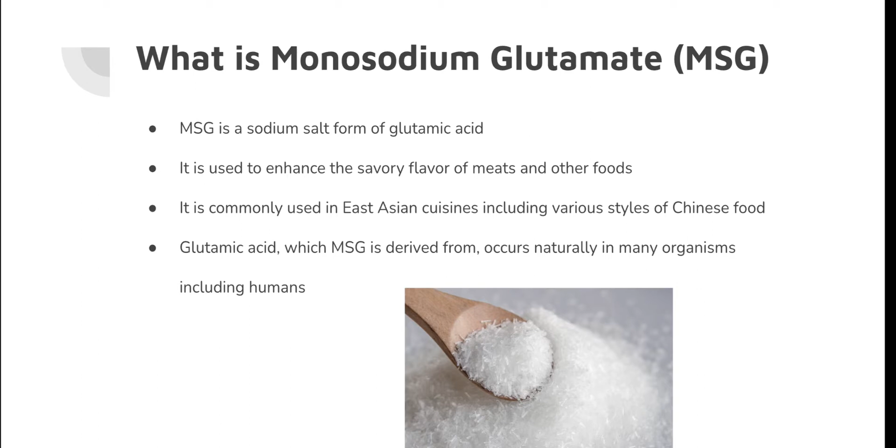What is monosodium glutamate, or MSG for short? MSG is essentially the salt form of the naturally occurring amino acid, glutamic acid, with a sodium ion substituted in place of the proton on the amino side carboxylic acid group. Its main purpose is as a food additive, mainly a seasoning used to bring out and enhance savory flavors in meats and other savory foods.

Early commercial manufacturing of monosodium glutamate saw production through the use of the bacterium E. coli. Our production method involves the use of a different species known as C. glutamicum, which is safer as it is not known to be a pathogen like E. coli, and it is more efficient in terms of production of glutamic acid as well as other amino acids.

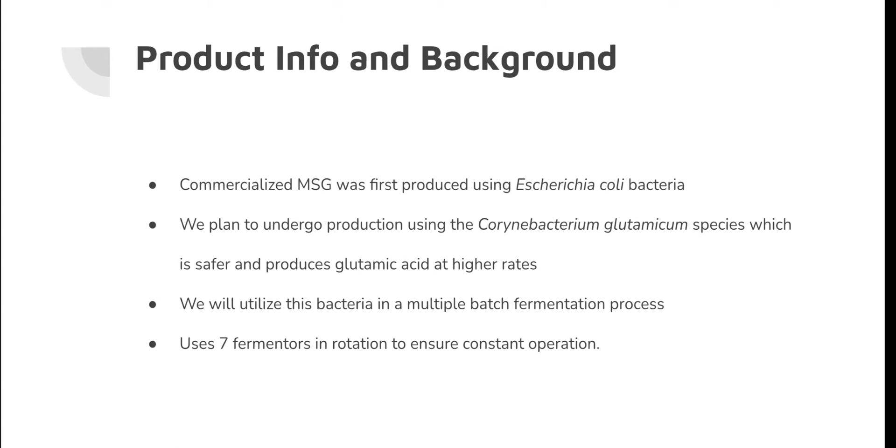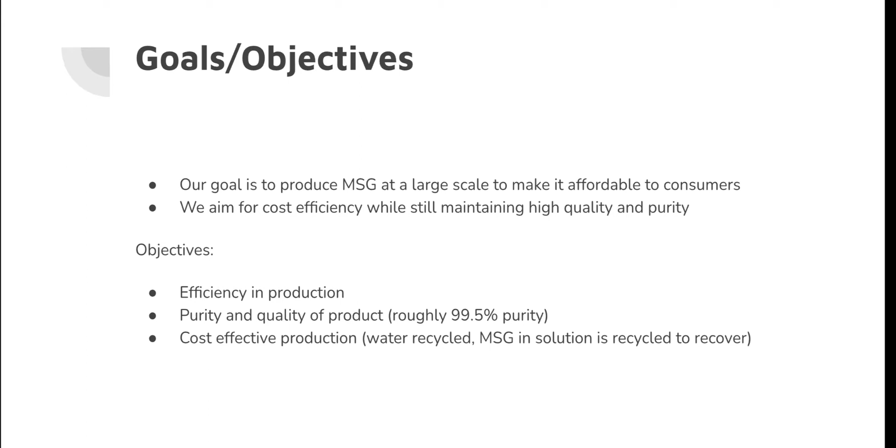Our company's goal is to produce MSG on a large scale in a manner that allows for affordable pricing and thus easy consumer access. We hope to maintain a high level of quality and purity in our product while still marketing our product at a low price. We aim to achieve this through efficiency in production, such as staggered fermentation to avoid downtime, as well as recycling our water used in various stages of production and recycling our MSG containing solution to minimize loss of product.

This is our quality function deployment, comparing customer needs to the specifications required to meet them. Here you can see that our top priorities are the quality of raw materials used in production and a thorough purification and refining process for our final product. This aims to meet our top consumer needs for a food seasoning product, which are simple: to make sure it tastes good and does not contain any abnormal flavors from impurities, and to ensure the overall purity and safety of the product.

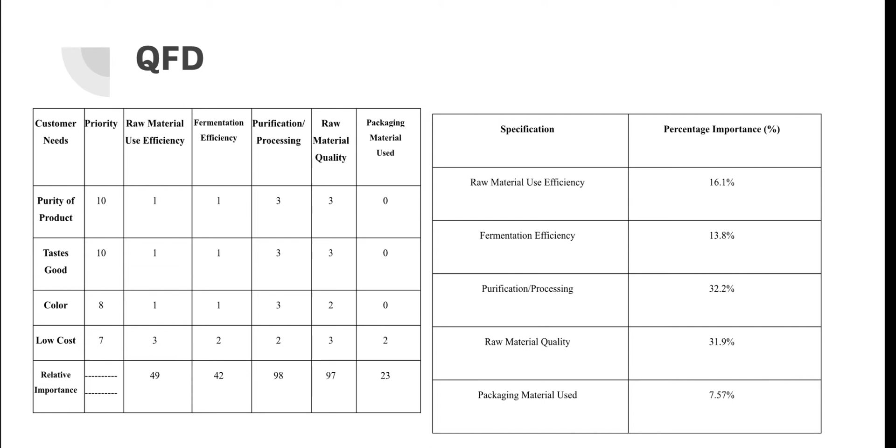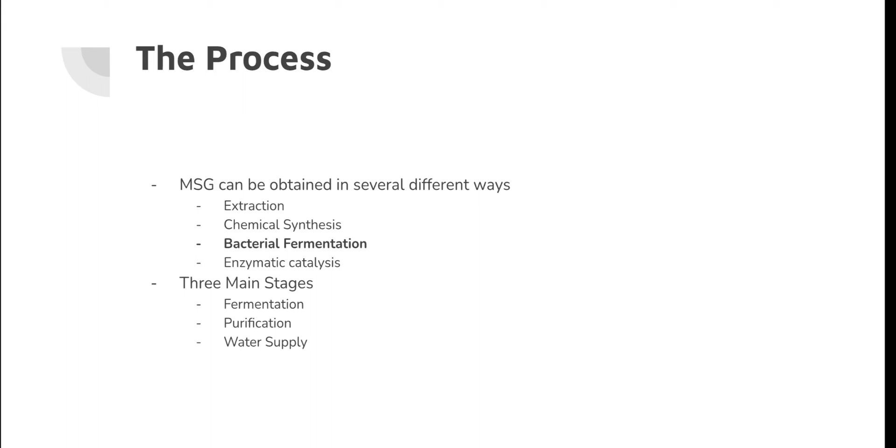Moving on to the production process of MSG, MSG can be obtained in several different ways. They can be attained through extraction, chemical synthesis, bacterial fermentation, and enzymatic catalysis. Our company will be focusing on bacterial fermentation as our method of production. It has 3 stages: the fermentation stage, the purification stage, and the water supply stage.

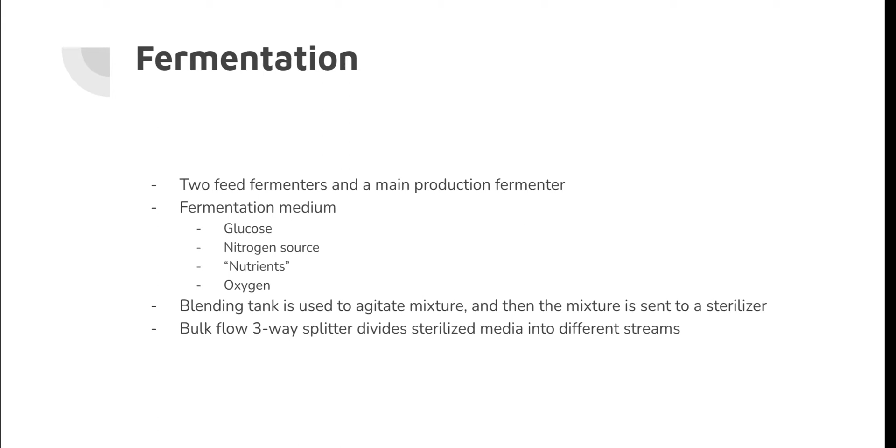The fermentation process consists of 2 feed fermenters and a main production fermenter. All 3 use the same medium. It consists of glucose, a nitrogen source, nutrients, and oxygen. A blending tank is used to agitate the mixture, and the mixture is then sent to a sterilizer. Once sterilized, a bulk flow 3-way splitter divides the media into 3 different streams.

Once the sterilized media is divided into 3 streams, the broth is then sent to the next feed fermenter. All fermentation procedures include the following operations: the steam in place, which ensures sterile conditions, the pull-in media, pull-in water,

the transfer in NH4OH, where pH is adjusted with the addition of ammonium hydroxide, which is also the main source of nitrogen, pull-in inoculum, the fermentation stage, where the microorganisms grow and convert glucose and other nutrients into glutamic acid, the transfer out stage, and the clean in place stage, which takes place at the end of each batch and includes an initial water flush, a wash with 2% NaOH, and a final water wash.

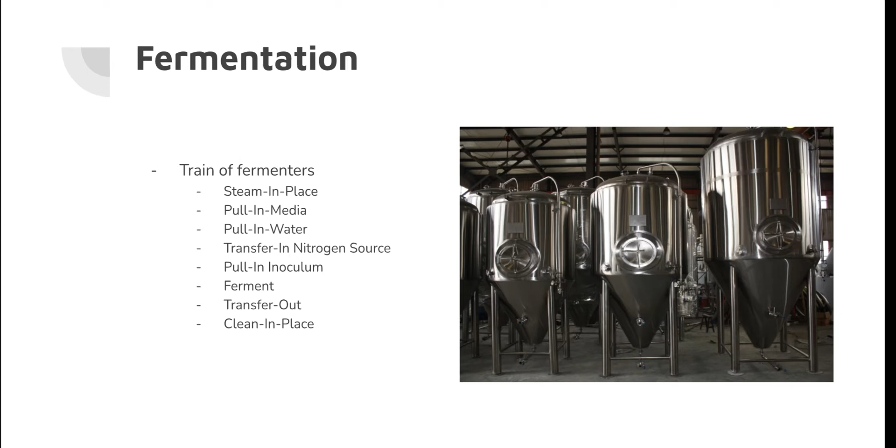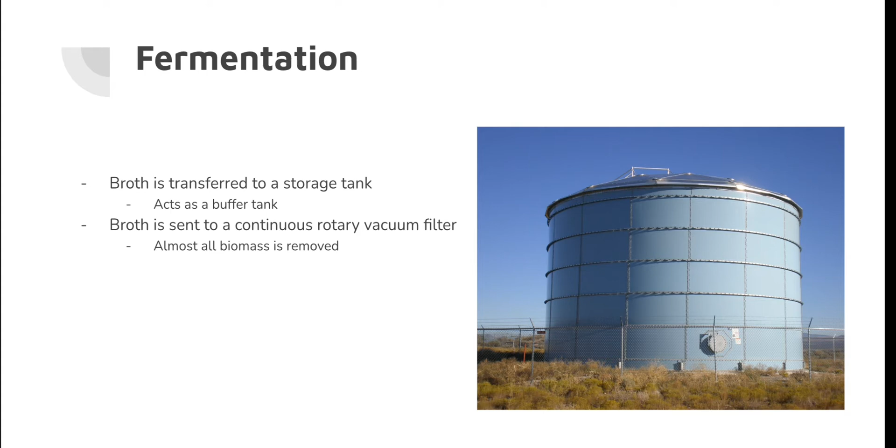Following the main fermentation, the broth is then transferred to a storage tank. This tank acts as a buffer tank that receives material from the fermenters that operate on batch mode, and also feeds continuously the downstream section, which operates in continuous mode. The broth is then sent to a continuous rotary vacuum filter where almost all the biomass is removed.

Following the fermentation stage is the purification stage, where the product is currently in solution. The cake is washed with water, and the filtrate of the rotary vacuum filter is heated and then passed through a mixed bed ion exchanger. The mixed bed ion exchanger has following operations.

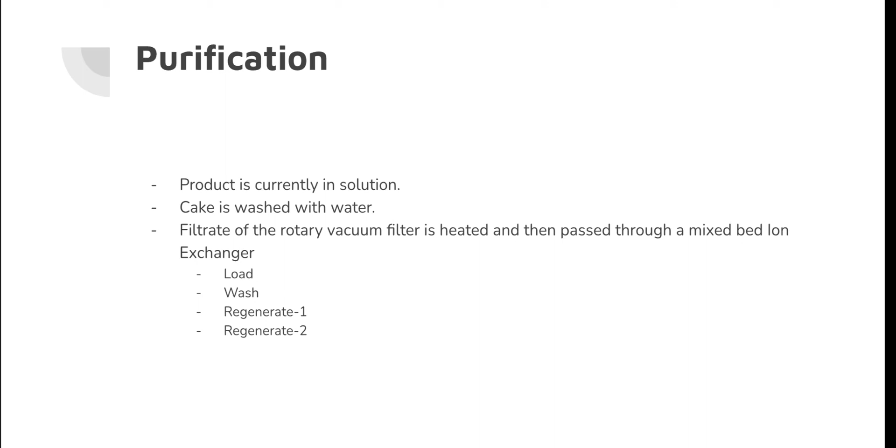It has the load, the wash, the regenerate 1, where the column is regenerated with 2 bed volumes of 1 molar HCl solution, and the regenerate 2 stage, where the column is regenerated with 2 bed volumes of 1 molar NaOH solution.

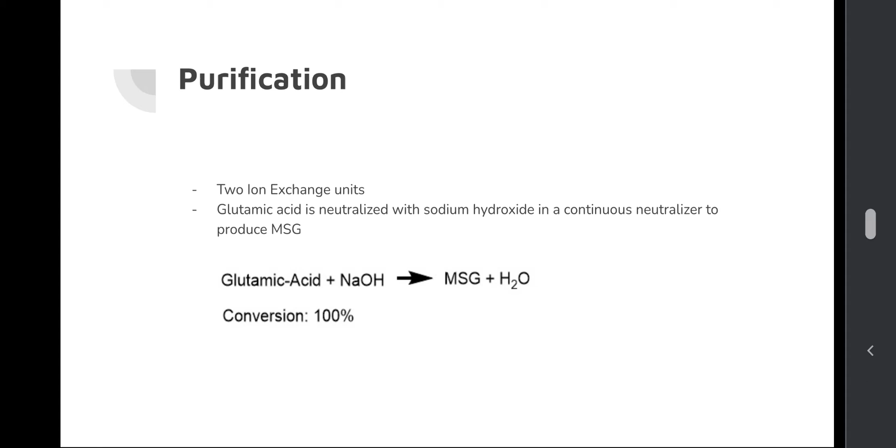2 ion exchange units are operating at all times. While one column is in load mode, the other column undergoes washing and regeneration. After the ion exchanger, the glutamic acid is neutralized with sodium hydroxide in a continuous neutralizer to produce monosodium glutamate according to the following reaction. Here you can see the reaction and that the conversion rate is at 100%.

Following these stages, the condensate and vapor streams are sent to the water supply section for recycling. The concentrated product solution is then sent to a continuous crystallizer and is cooled using chilled water. The solubilized MSG is converted to crystal form, MSG-Cr.

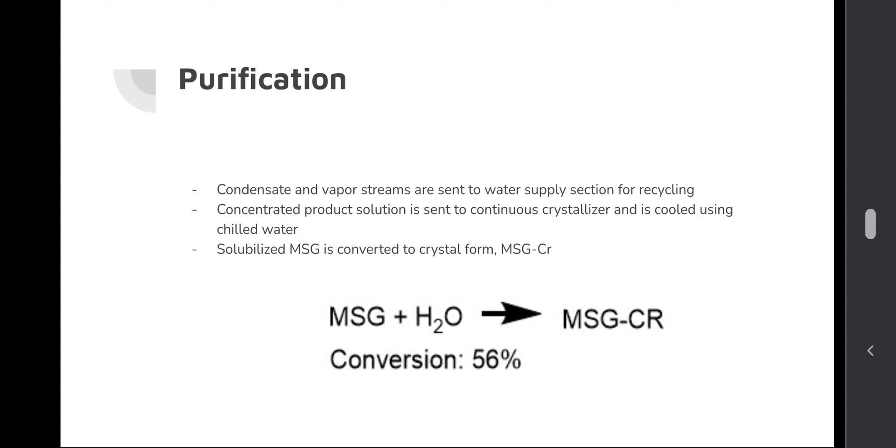Following crystallization of MSG, the crystals can be recovered and washed using a set of 3 basket centrifuges. These include the following operations: the filter, the cake wash, and the transfer out. The washed MSG crystals are then sent to a rotary dryer, which removes 99% of water using air heated with steam. The final product purity will be 99.5%.

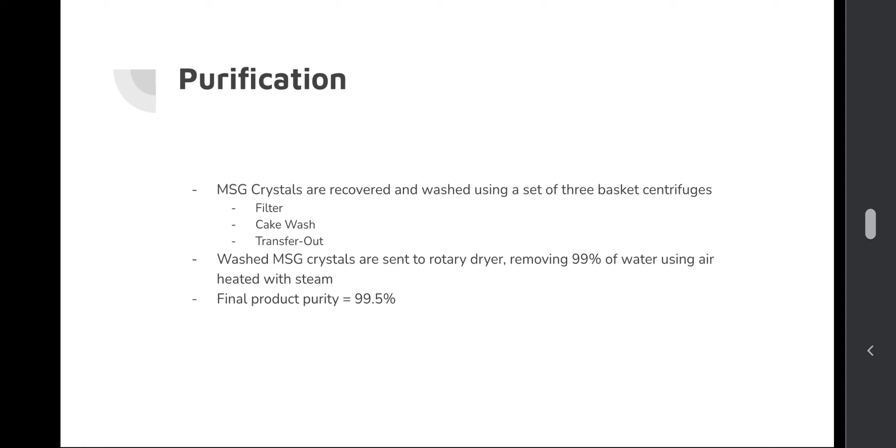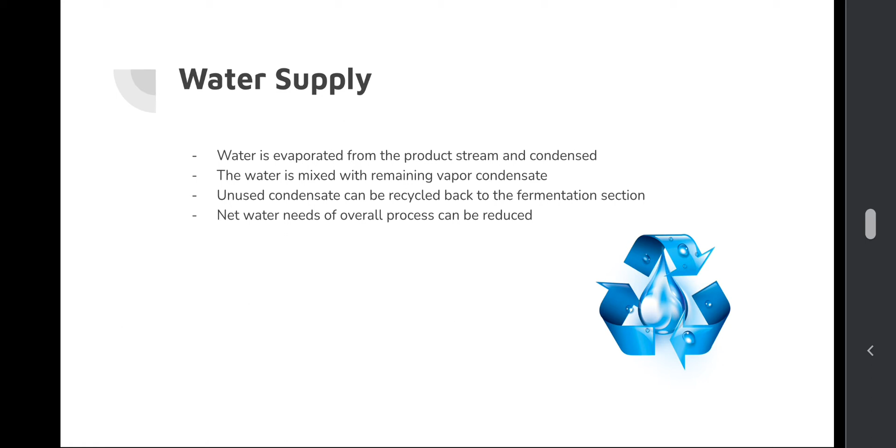Finally, following both the fermentation and purification stages of the MSG production process, is the water supply stage, where water is evaporated from the product stream and condensed. This water is mixed with any remaining vapor condensate, and any unused condensate can be recycled back to the fermentation section. With this, the net water needs of the overall process can be reduced.

This is the fermentation block of our PFD. On the left side, we have 3 sections. The first is for the sugar broth mix for the bacterium to grow in. The second is for the ammonium hydroxide mixing, used to regulate the pH of the fermentation batch. The third is for air filtration, used to feed air into the fermenters, as they need the air to create the glutamic acid.

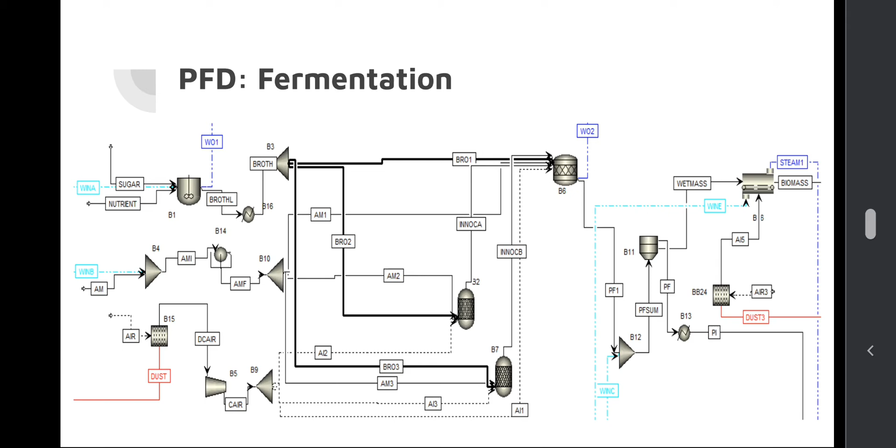Once these mixes are made, 2 are sent to seed reactors where they create an inoculum, which is then fed into the final reactor, B6, which we'll use to generate all of the glutamic acid. Once generated, we send it down the PF1 stream to a centrifuge, which separates out the biomass, which is then processed and resold, and the other portion is sent down to be sterilized and then sent to the neutralization block.

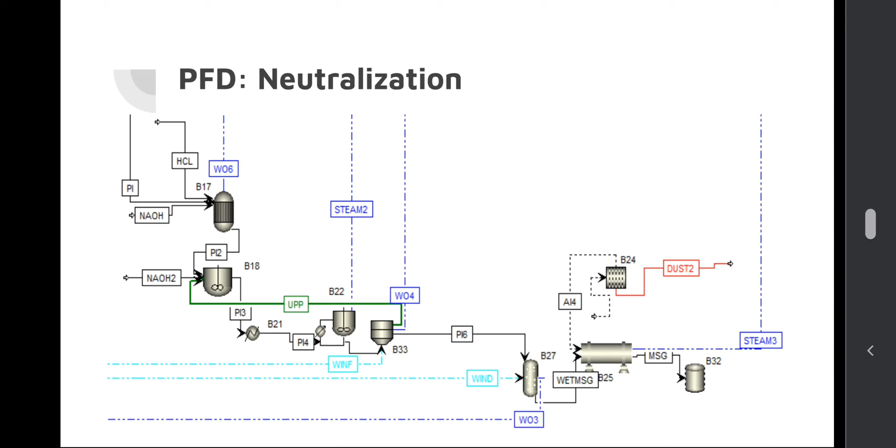This is then sent to a centrifuge where it is separated out from its liquid component. The liquid component is sent back to the tank to be recycled, while the solid component is sent to a clarifier to be cleaned, and then once cleaned, it is sent through a rotary dryer to be dried to 99.5% purity and sent to storage.

Finally, we arrive at the water management block of the PFD. Any steam is condensed back to liquid form and then run through 2 separate forms of filtration, solid-to-liquid and liquid-liquid filtration. Once purified, the water is then sent to storage for when it can be used for the next batch.

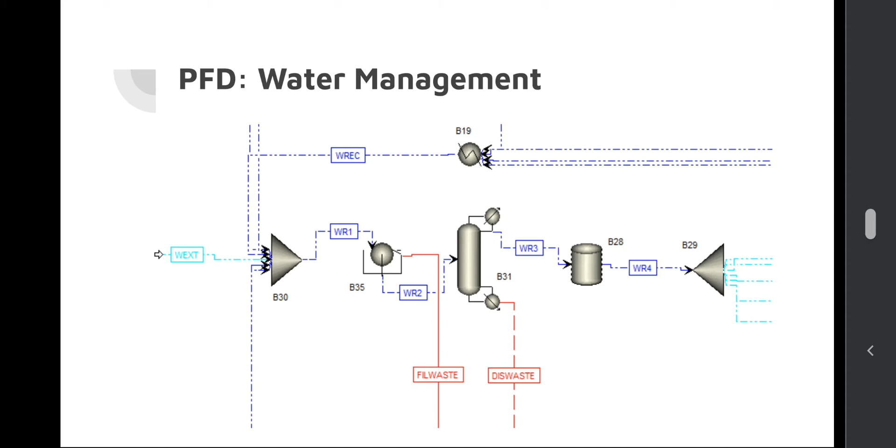Onto the material balances portion of the project. On the left-hand side, we have the raw materials used to create MSG, and on the top row, we have each of the streams present on the PFD. The columns that are blue in color denote water being run in or out of a process unit.

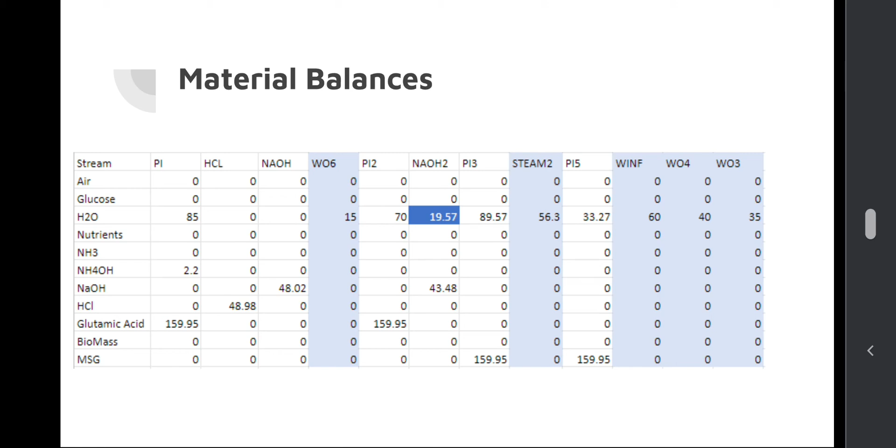The deep blue cell on the third table points out that water was generated from a chemical reaction involving glutamic acid and sodium hydroxide forming water.

Onto the final table of material balances. The golden column shown is the recycling stream sent back to the mixing tank containing uncrystallized MSG and water to be recovered for a later batch.

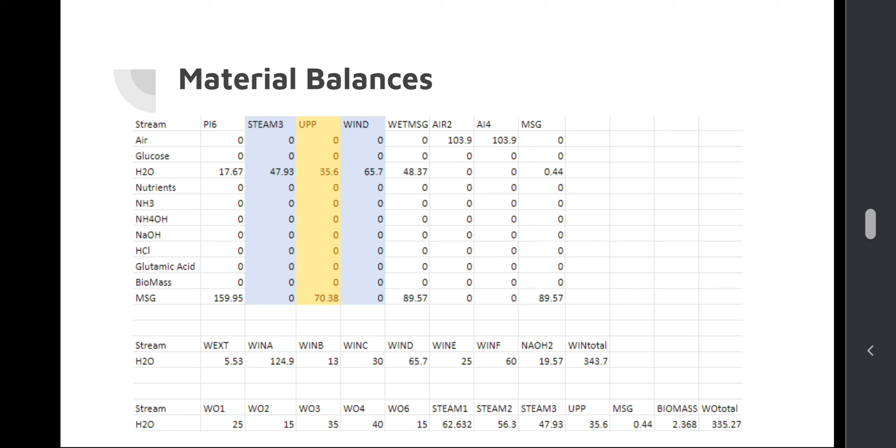Below this, we have the totals of the water in streams and the water out streams. You'll notice there's a slight difference in the numbers, and this is due to the recycling stream as well as the generated water from the MSG reaction.

For energy balances, the company calculated the energy balances for each process unit for a single batch. The process units consist of 3 heat exchangers, 1 condenser, 3 fermenters (2 seed and 1 main), 2 rotary dryers, and 1 distillation column.

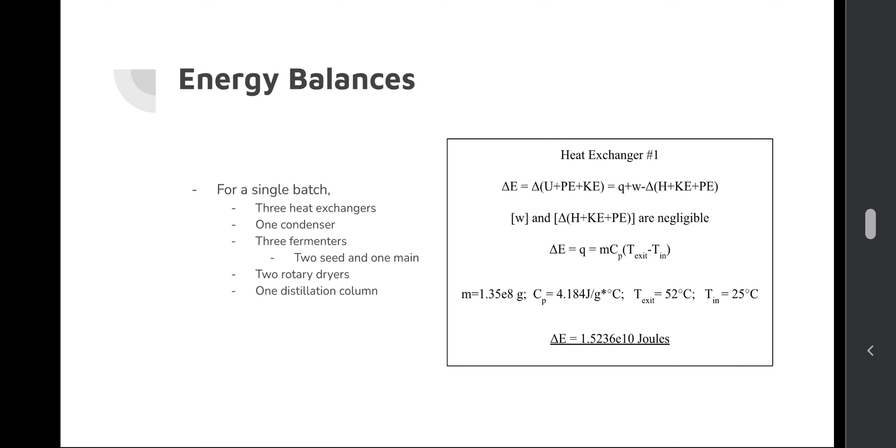To the right, you can see an example of one of the calculations for our heat exchanger 1, and the energy required for it was 1.5236 times 10 to the 10th power joules. You can see the total energy balances for each individual process unit in the table on the slide here.

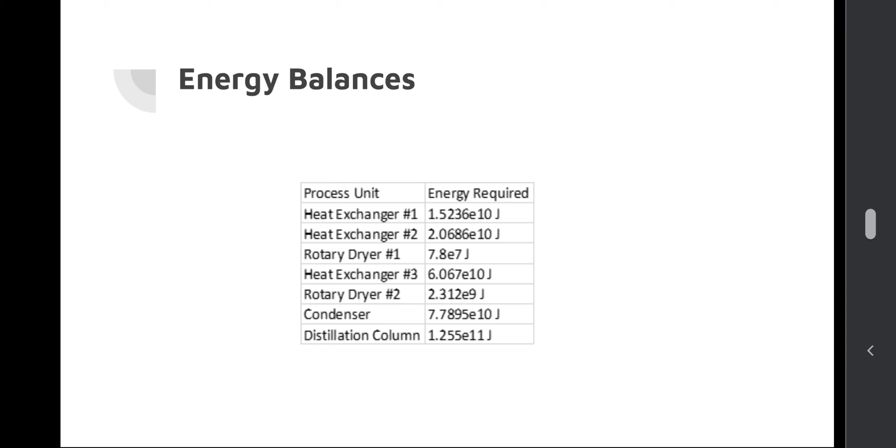Here we have the economic analysis for our MSG production. As we see here, the equipment cost featured in the ISBL limit totals to approximately $5,132,000 US dollars. Note that the majority of this comes from the 9 total fermenters we have running, as well as the evaporating system.

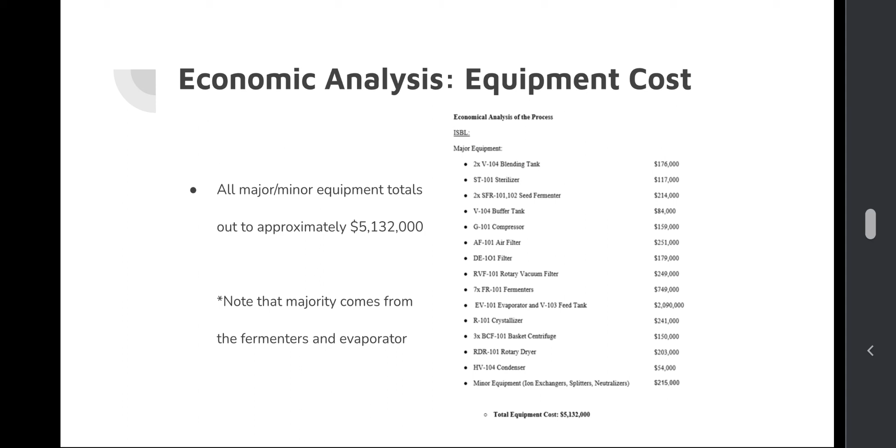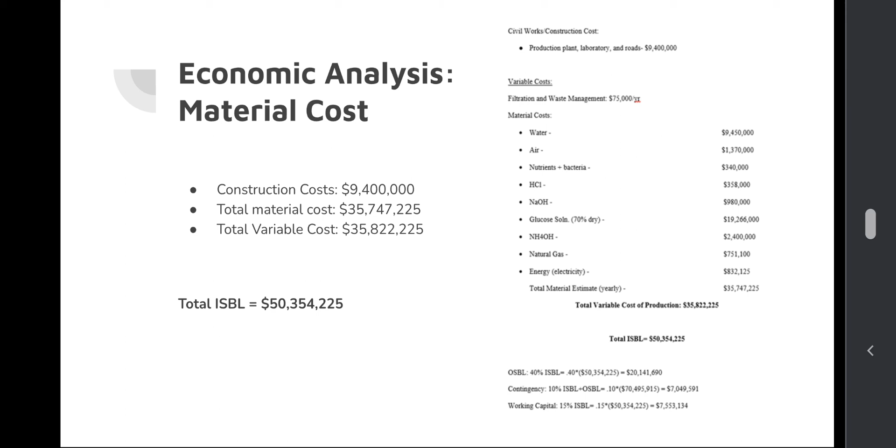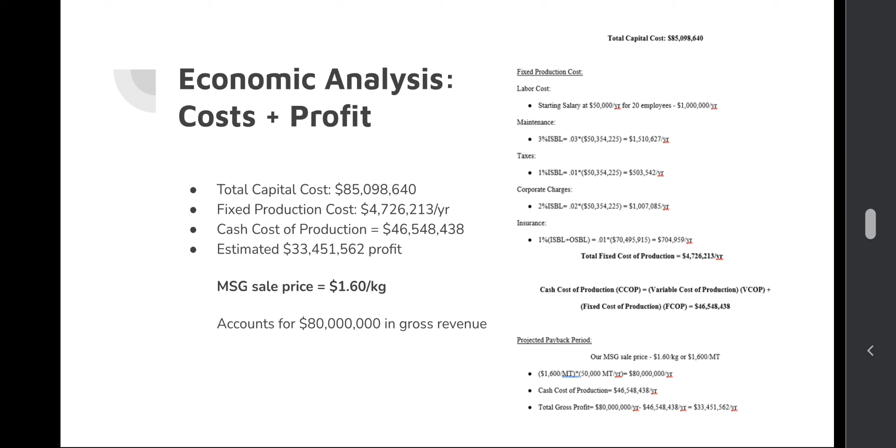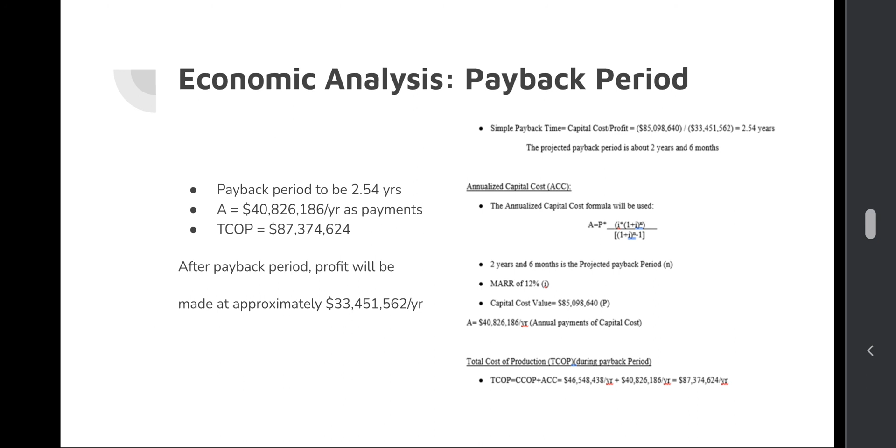Our ethical code is short and simple and follows the fundamental canons of engineering. Security measures: our factory will have flame retardant building materials such as the walls and ceiling panels, plus fire extinguishers, fire blankets, and chemical showers, as well as eye wash stations for safety.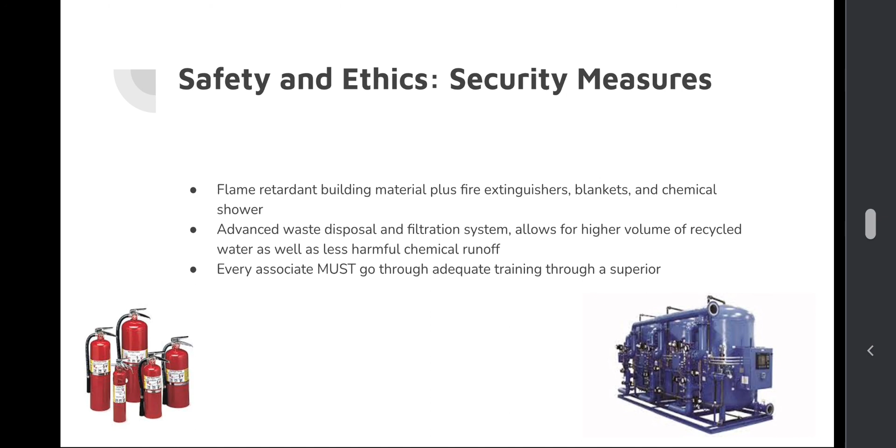Our advanced waste disposal and filtration system allows us more recycled water, as well as less harmful chemical runoff into the environment. One thing we require is that every associate must go through adequate training through a superior before working in the field.

In conclusion, our method provides a safe, efficient, and very profitable process for MSG production, with a very ideal payback period of 2.5 years, as well as an extremely generous $33 million of estimated profit to be made after debt is finally paid off. Not only this, but this is an excellent long-term investment.

$334 million can be made after 10 years of investing, making this very ideal and secure.